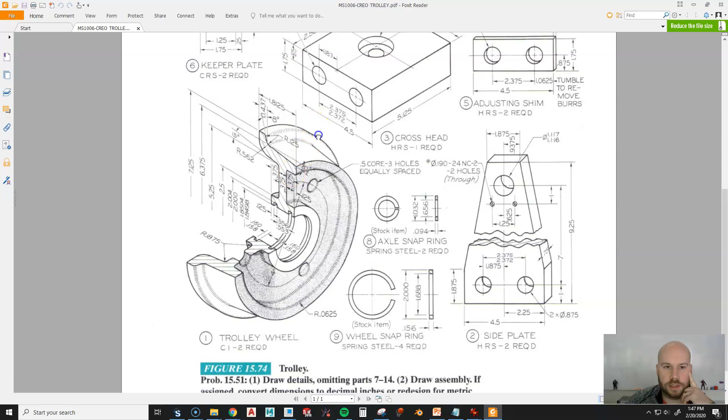Today we're going to make a drawing of this trolley wheel. This drawing has a lot of really oddly placed dimensions because of all the different functions that this thing handles in this assembly. So there's a very specific way we want to go about it. I'm going to show you some techniques. Your drawing at the end doesn't have to look exactly like mine, but I'll show you some ways to organize things and get them in place.

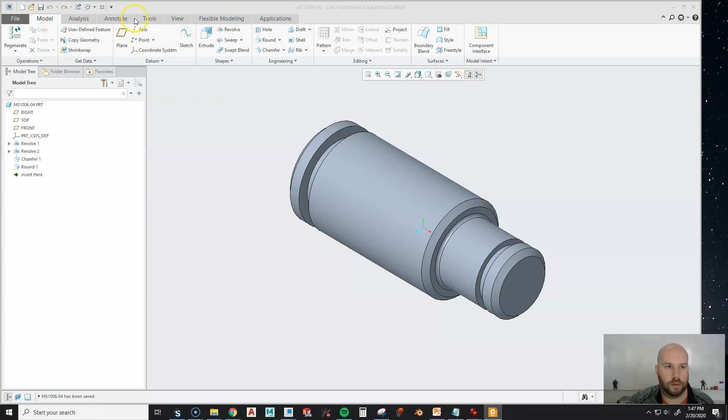I'm going to pull up my wheel I made in a previous video. I'll go New, Drawing, and name my drawing what I named my wheel - maybe different for you. Empty with format. I'm going to browse and pull up one of my formats that I've created in a different video. So this is a big piece.

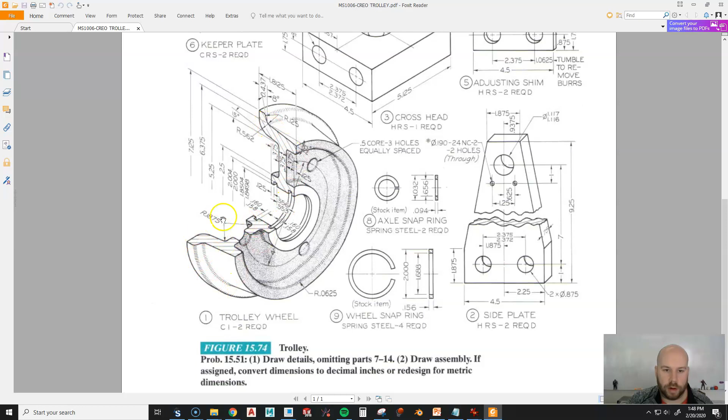I'm going to assume I need at least a couple views, and with a lot of dimensions, I want them easy to read but not crowded. So I want to look at a C or a D size. Looking at this piece, we have a lot of diameters, widths, rounds, probably going to need some sections too. So I'm going to lean towards a D size just because of the complexity of the piece, though I could probably get away with a C size - I just want a little more room, to be honest. I'm going to go ahead and pick that and hit OK.

Now, because I haven't put any parameters into this piece in the video I made it, it's going to have a lot of parameters I need to fill in. The material for this is cast iron, no material 2. The title is Trolley Wheel, no title line 2. Next assembly is going to be whatever the assembly drawing number is for this year's project - it's MS-1006. Drawn by me. The revision is going to be a dash for now, and the date I'm drawing this is 2/20/20.

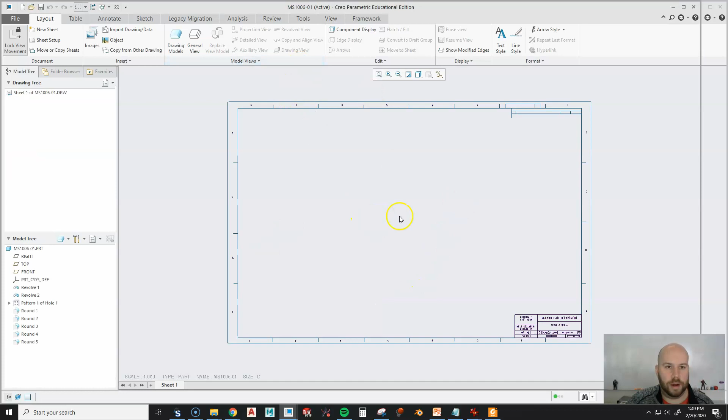Good vision today. Okay, so now I've got my template here. I'm going to hold right click and put it in a general view. I'll turn off the combined state since that doesn't apply here, so I'll hit OK, then left click.

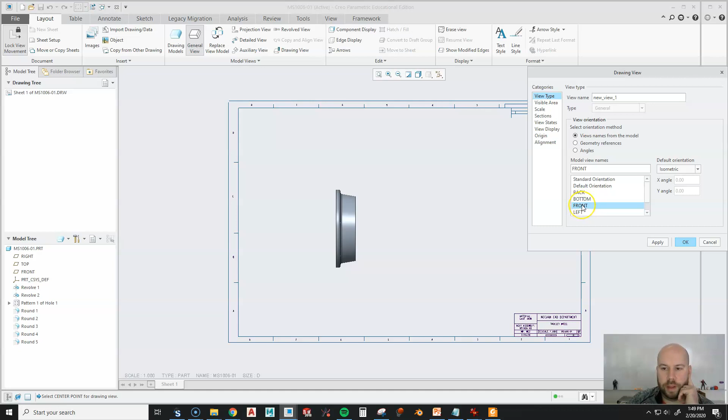I'm going to look at a couple different things. First off, this is probably not my best primary view. The reason is that this one here shows much better what my overall part looks like - it shows right away it's round, and tells the person who has to make this what type of material stock to start with. So I'm going to hit OK on that one.

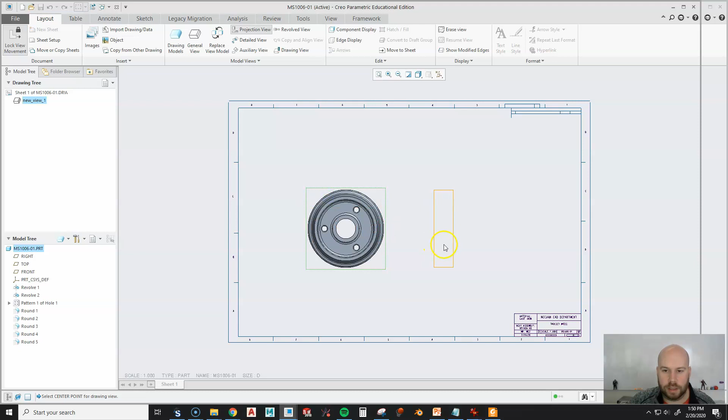Now I'm going to project some views off. First off, I think I'm going to need a side view for sure. That's going to be important because I have a lot of features that are inside. I might be able to get away with just using a section on this, but I have a feeling I might need more views than this. I'm also going to throw a general view up here because I want a nice ISO. I'll hit OK.

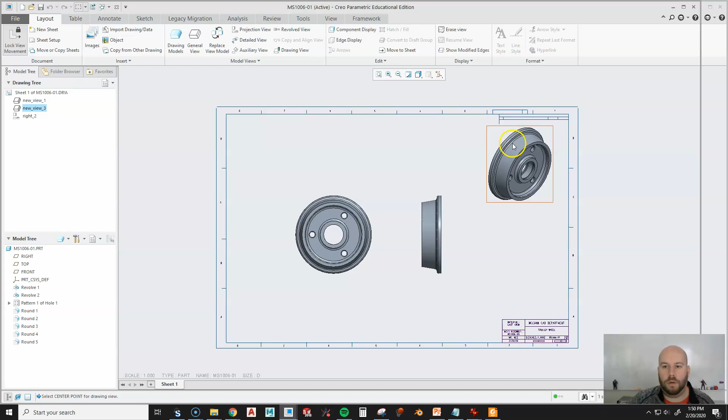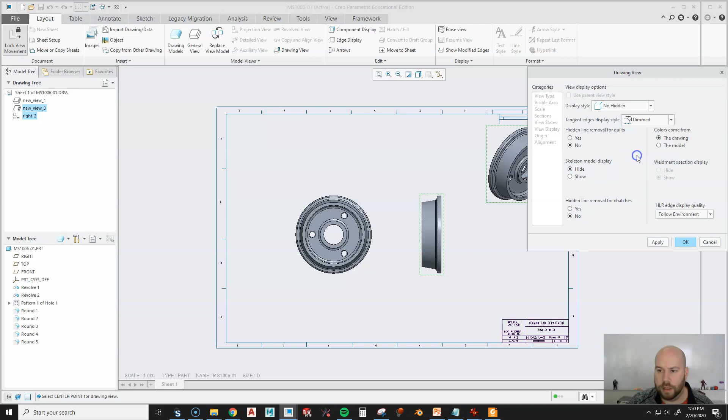Here's why I do that - now I can hold Control, pick all of these at the same time, right click, go to Properties, and change all of their display style. There's a lot of features here, and I don't see value in showing hidden lines on these two, so I'm going to go no hidden. I like the dimmed setting - it's up to you what you want to use, but I really like dimmed for tangent edges. I'll hit OK.

Okay, didn't pick that one, so I'll do the same thing - view display, no hidden. It's getting aggressive. Dimmed, I'm going to hit OK. Now I can't move my views right now - that's because I have to turn off my lock view movement.

You can turn that off in your DTL settings if you want to. All right, I'm going to move that down and move this over.

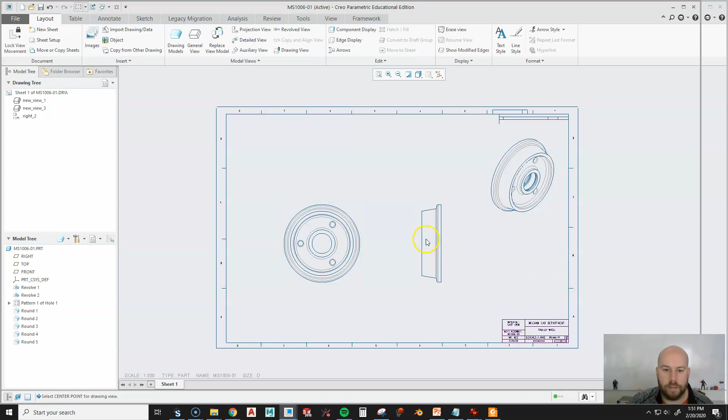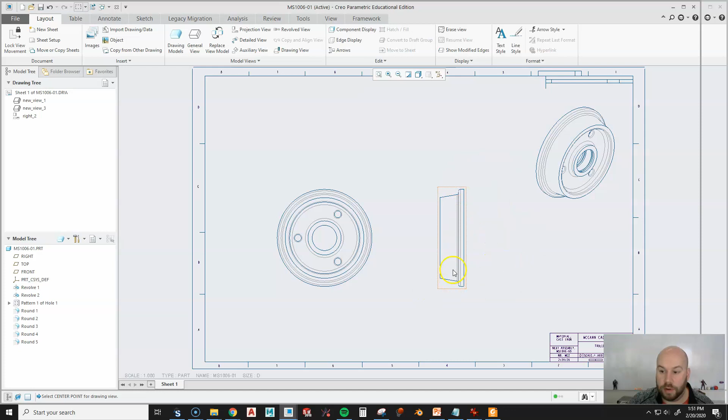Okay, now I probably need a section. Just to make it a little simpler, I kind of like this side, but I do have the potential of a hole crossing through this here. So I might want to use this one for showing maybe just simpler outside features, and then maybe I want to project a view up here.

I'll double click it to change my view display. No hidden, dimmed, I'm going to hit OK. Maybe this is a better one for my section because then my cutting plane is going to go right through this circle and I can show the rounds on either side of it.

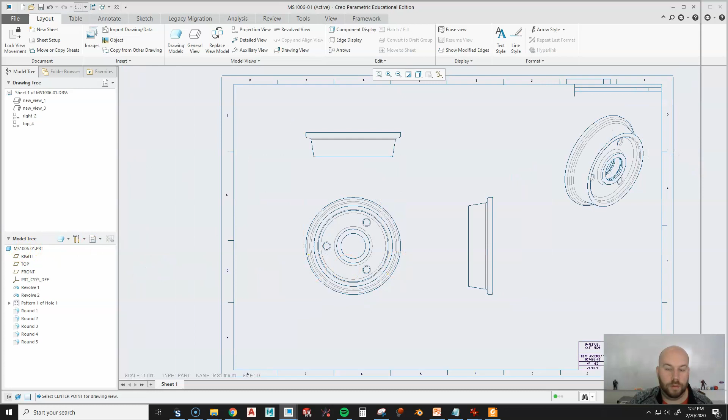Okay, so now I'm going to go back in my part. I'm going to put a section view in. So I'm going to right click on 1006-01. I'm going to hit Open. And then I'm going to go to my View Manager right up here. And I'm going to pick Sections.

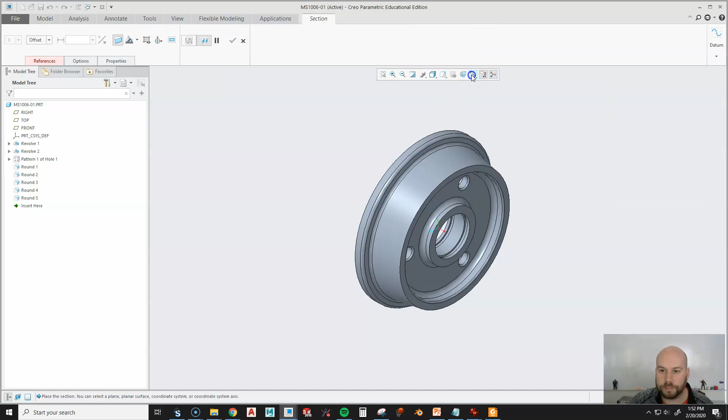I'm going to go New and I'm going to make a planar section. I'm going to name this section A because it's my first one. I'm going to turn on my planes. I'm going to say A goes right through here.

Okay, and you can see now, I can see that round really well, and I can see the hole goes through. So I'm going to hit my checkbox. I'm going to say close. I'm going to save it. I'm going to close out of this. I'm going to come back over here, and I'm going to turn my planes back off.

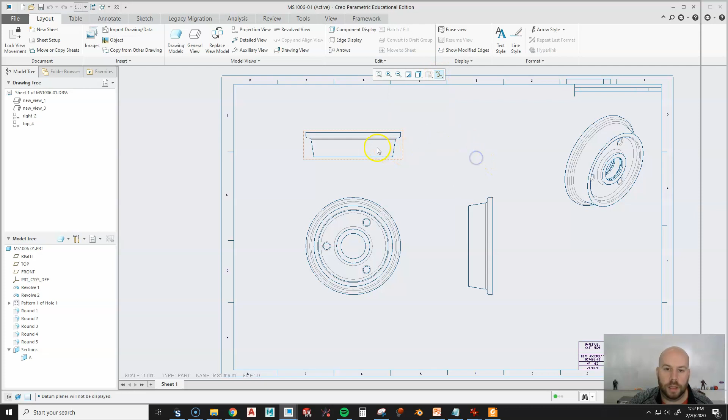Okay, now I can double click on this view, which will bring me into properties. I'll go to sections, 2D cross section, hit my plus sign, go to A, and then the other thing I like to do is scroll all the way over.

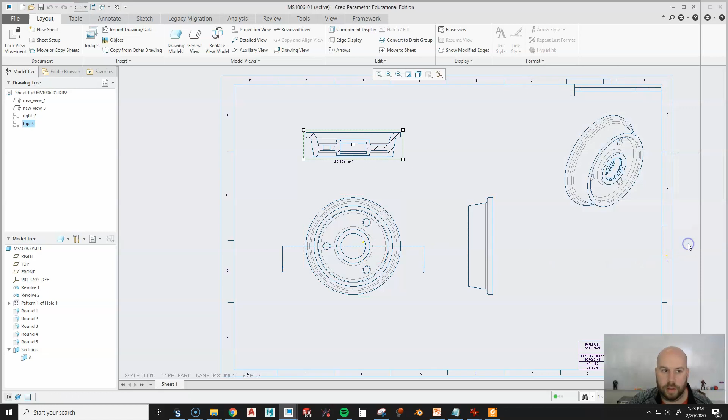I can do this after, but I'm going to select this. I'm going to say I want my arrows right here, okay, on that view. So now I can hit OK. And now I've got a nice section here that shows everything.

Now there's a couple things I like to do every time I put a section in. First thing, I hover over the hatch, okay, and then I left click it, hold right click, and go to properties. Okay, now here's why.

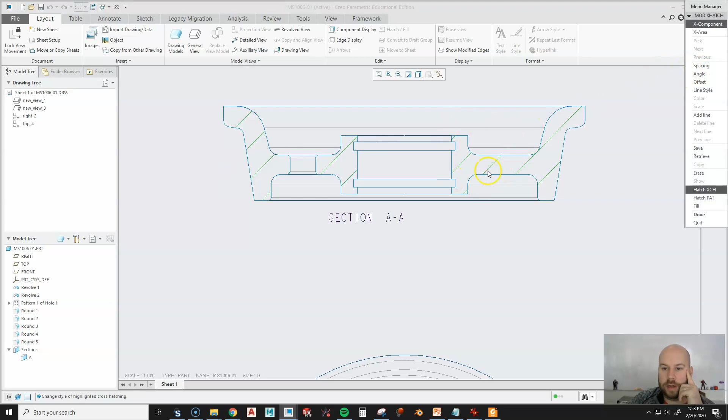All right, I do not like the spacing of this right now. If I zoom out, you know, I can kind of tell it's a section, but the spacing's not dense enough for me. So I could go spacing, and I can go half. All right, that's probably good. I could even go more if I want to. I like kind of a dense section like that personally.

All right, I can also mess with all sorts of other stuff. Right now, this is at a 45-degree angle by default. I could go 30, I could go 0, I don't know why you'd go 0, 30, 45, 60. I could change it if I want to go 44.75 for no reason. I could do that.

Okay, when you're making an assembly section, this is much more valuable because now you can differentiate parts a little bit easier. I can change styles, everything, but I'm good with this.

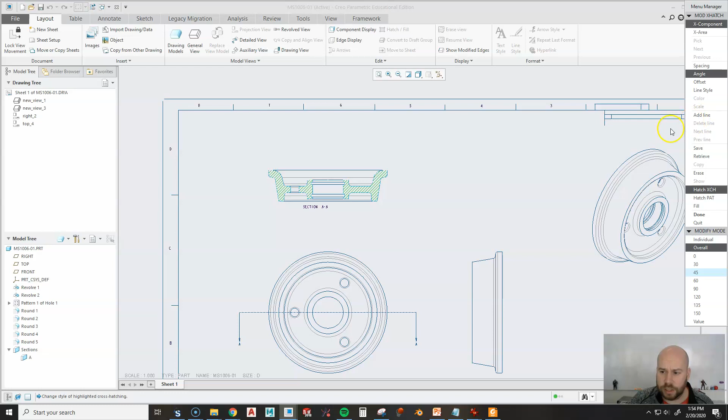So I'm going to middle click a few times to get out of there. And then when I left click, you can see now my section's a little bit better.

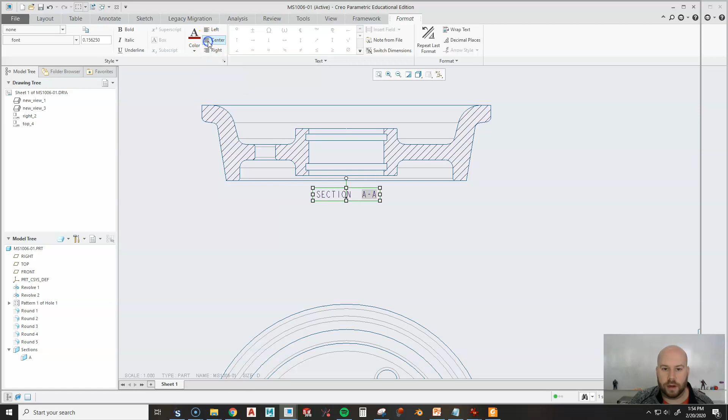All right, the other thing I like to do is I like to pick the section title, go up to Format, okay, and I like to move it to Center because that'll put it right in the center of your view. Don't ask me why it's not that way to begin with, but it is.

So I'm going to left click. I'm just going to drag it down. I'll probably put an offset line in or something later on.

Now, as far as your section cutting plane goes, the way I like to move it around is you can left click on the cutting plane to highlight it. Now you can see I get this little movement arrow. If you click on the arrow that's coming out and left click and drag, you can see both of the arrows move together.

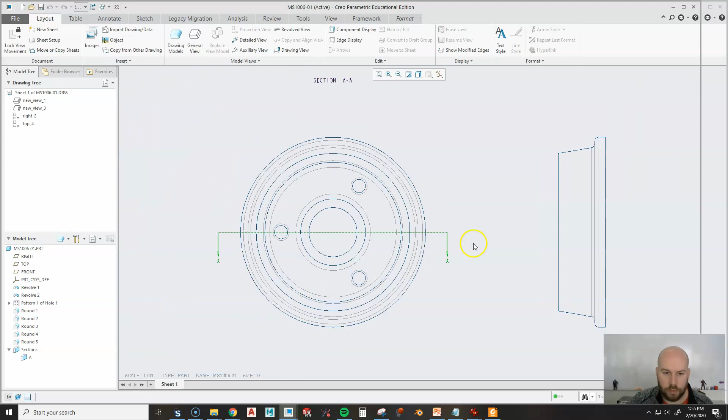Okay, so I can drag this in, and the arrows will stay in line. Now in some scenarios you might need one that's a little longer than another one. Then you just click on the arrow and drag it out. But if I'm clicking between the arrow, like the line that comes from your phantom line, it's going to move them together. I like them to be at the same length unless I have to move it around for some reason.

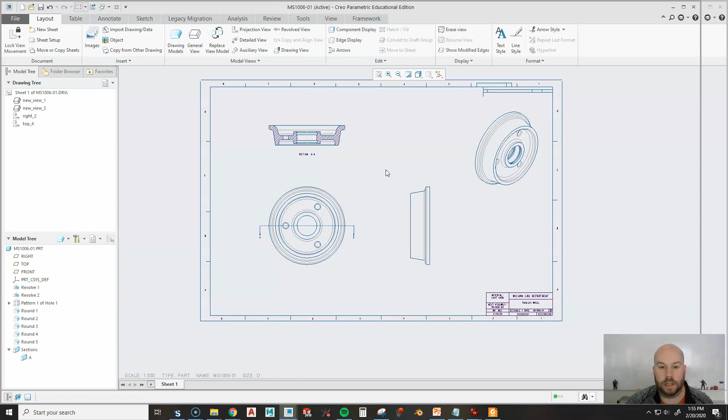All right, now I'm going to give myself some space. So I'm going to left click my view and spread them out a little bit. And I'm going to start putting in some dimensions and see where the best places to put them are. Now where my dimensions go are going to dictate, for example, if I have axes that are showing or not. As we go, that's probably going to become more apparent.

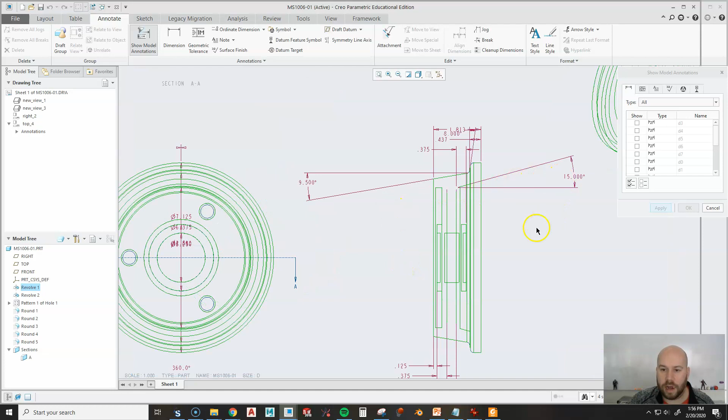So I'm going to go to Annotate, Show Model Annotations, make sure I'm on the Dimension tab, and what I like to do is just kind of go right down the tree. So I'll go Revolve number 1, I'll see what pops up. Revolve number 1 has a lot of information, and the reason for that is that's basically all of my dimensions other than my retaining rings. So there's a lot of information I need here, and a lot of it's going to have to go up here just because I can't see some of that interior stuff.

All right, so basically what I'm going to do is turn them all on. I'm going to hit apply. I'm going to close out of this, and then the first thing I always do is I pick my 360 and delete it because we don't need 360. It's round, we can tell.

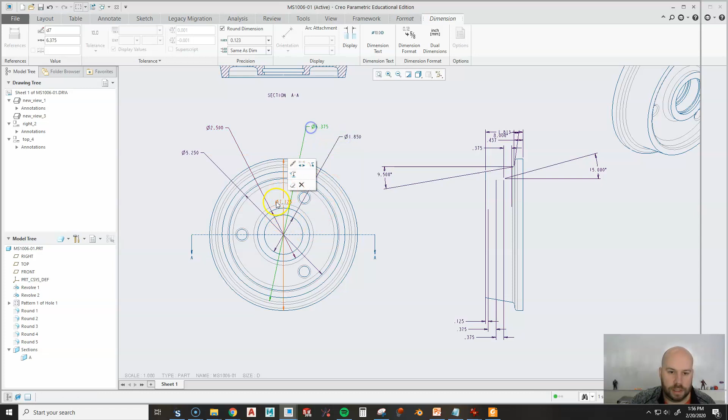All right, then what I like to do is drag these out. So I just left click it once and then left click again and drag, and that allows me to change where my dimensions are going just so I can see. I mean, obviously the size gives it away in some respect, but now I can see much easier which are my smaller ones, which are my bigger ones, etc.

So now I'm going to start moving these around without any real rhyme or reason right now. These ones all go to interior features, so I'm going to select them all. I'm going to hold control and pick this one too. See what else—that one's probably good for there, that one's probably good for there. This one's definitely not. All right, so I'm going to hold control, select each of them.

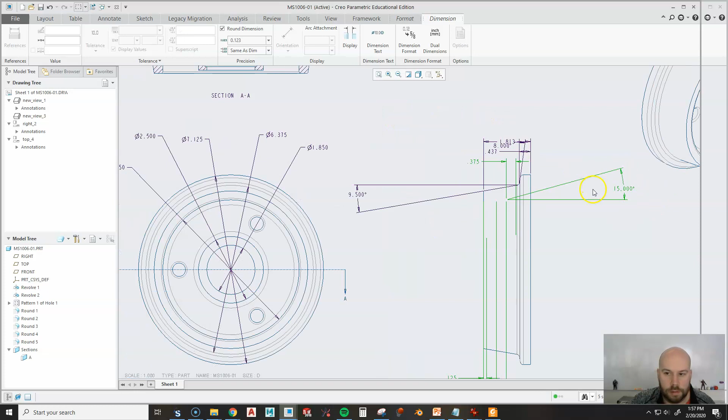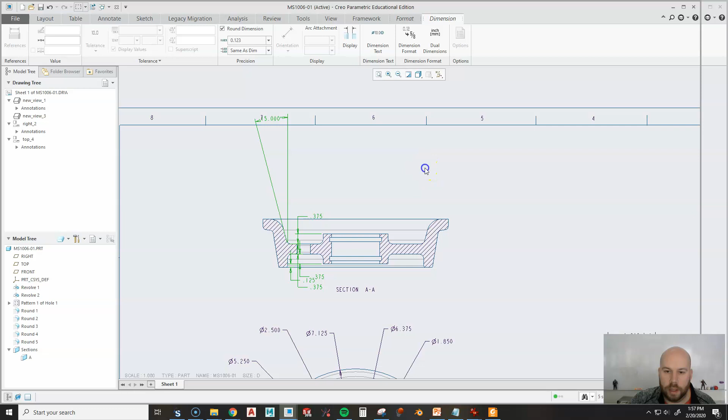I'm going to right click, and right up here we have move to view. So I'm going to select move to view, and click this view. Now, first thing I do before I move anything—because if I move it right now, they all move together—I'm going to click, so then I can click these manually and move them around.

All right, so I've got like a 15 degrees. That looks like a pretty handy dimension to have. However, I probably don't need all those decimal places. So once I pick it, I can change my dimension format to have 0 decimal places.

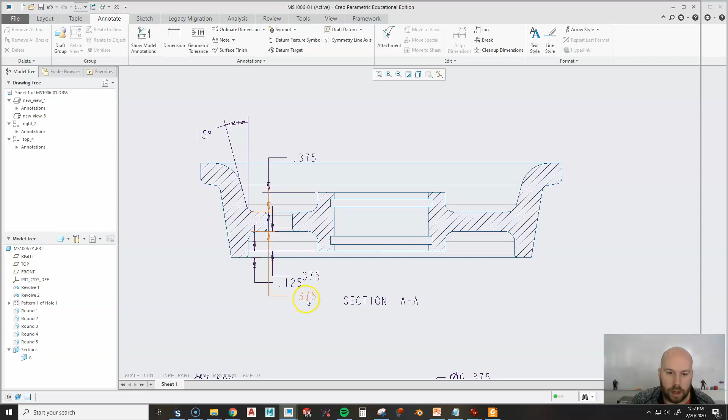All right, let's see what else we have. We have the thickness there. We have a distance to the front. And we have a thickness from there to there.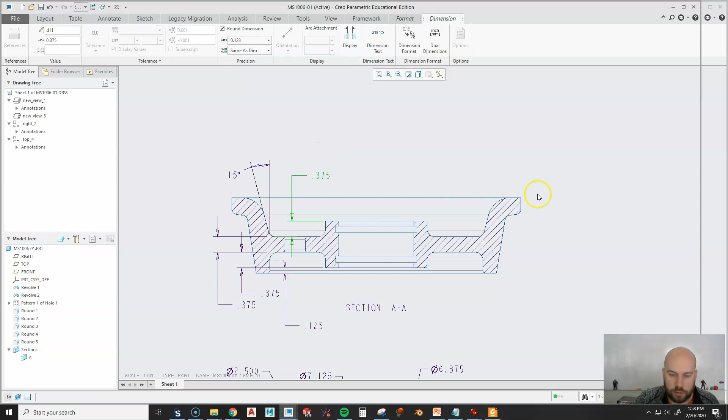All right, now I'm going to assume all these dimensions are actually needed. If I was personally going to dimension this thing, I might not dimension it the same way. But because that's the way the drawing initially looked, I'm going to assume that these are functional dimensions that are much more valuable than the way I would typically dimension it. So I'm just going to leave those how they are for now.

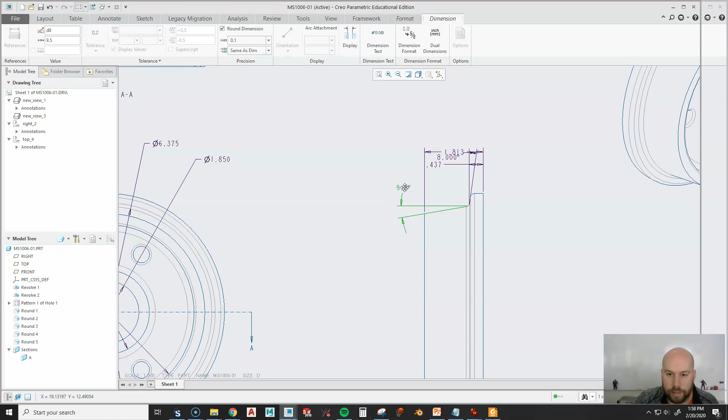The 15's a little cleaned up, but otherwise, I'm not going to mess around with it. Now this guy, 9.5, I can't go to 0, but I can go to 1 decimal place. Save myself a little space there. Okay, and then I'll probably just drag it out like that, flip it. All right, now I'll just drag this down.

That looks like a pretty good place for that dimension. A little confusing, might not be the way I'd dimension it, but I'm going to assume the people who made the drawing we're working off of had a reason for why they were showing these dimensions.

All right, I've got an 8 degree here. I can change that one. All right, I can move this up.

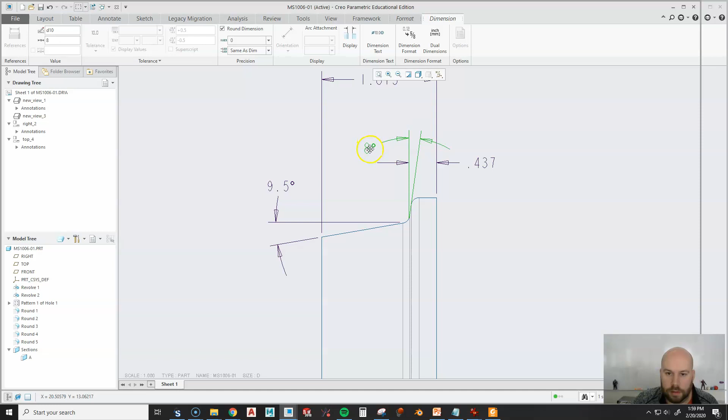And I'm going to flip that out, and now I've got a little bit of dimensions bunching together. So I'm going to take both of these, hold control, pick both of them, bring them all down here, and bring all these extension lines down too.

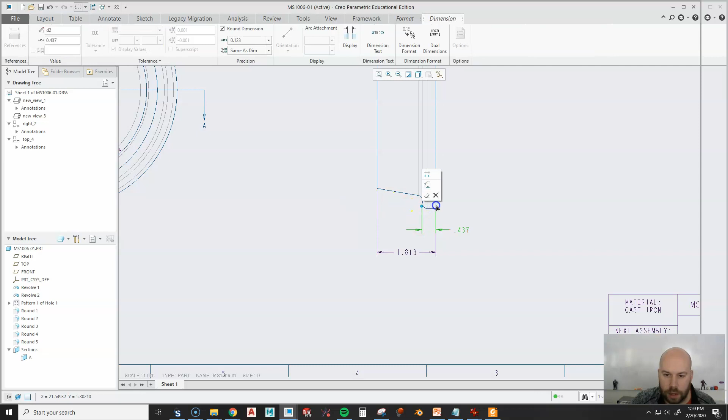And then I'm just going to rearrange them. So I'll go, you can go right there, you can go right down here. We'll bring that up, leave a little gap. Same thing, bring this up, leave a little gap as well. We'll rearrange them as we go.

Now the other thing I'm going to do is move my outside dimension over as well, because I think that's probably easier to visualize from over here. So I'm going to pick it, move to view, move it over here. Yeah, that looks like a way better place for it.

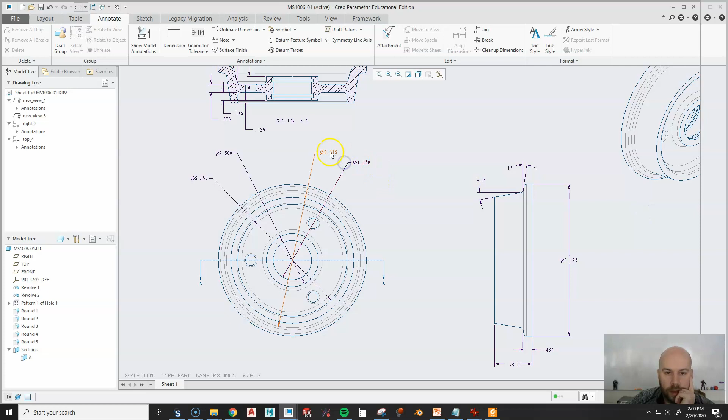Okay, now let's see what else we have. We've got a 6.375. That might be a good one to move over, so let's see if it works. We move it over, that looks like a logical place for it. Gives us a reference for that 9.5 degrees.

I like that. All right, we're going to drag this out a little bit. I don't love that this goes to like a theoretical intersection, but it is what it is.

Okay, let's see what else we have. This is our outside diameter of that. And this, let's pick this one, move it over to see where it goes. Yeah, so that's an interior dimension.

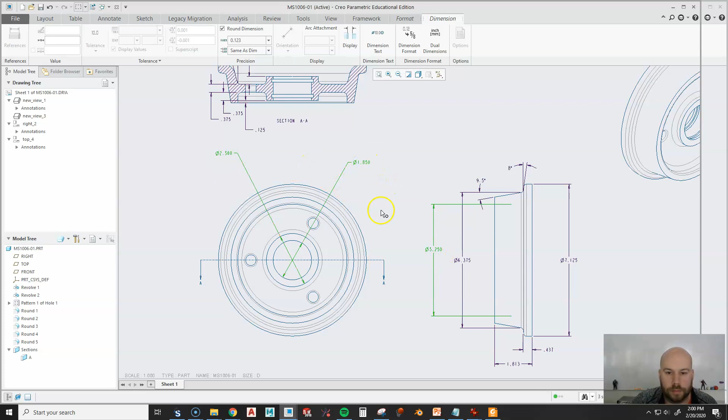So we're going to move all 3 of these up top. I'm going to hold control, pick all these, right click, move to view, move them up here. Yeah, that's a way more logical place for these.

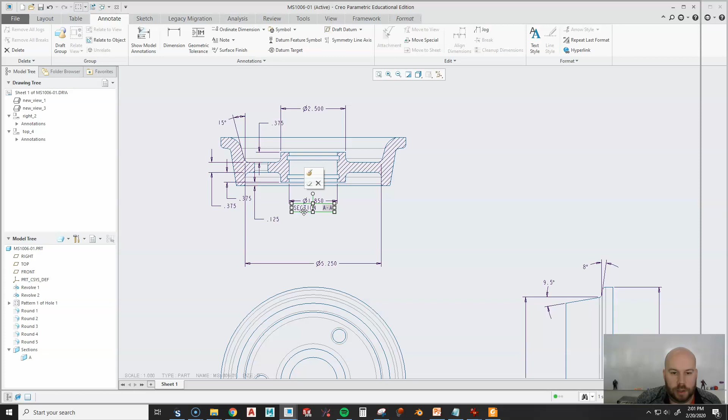Okay, so, excuse me, now I have a couple other options I can do. So first off, this stuff's really crowded right now, and it's going to continue to get more and more crowded as I add more dimensions. But I at least have a logical place for some of these things.

Now for me, I think we'd be better off with a detail view that could kind of simplify all the stuff that's going on inside here. So we're going to do that. All right, here's what I'm going to do.

I'm going to go back up to layout up here, and now I can pick detailed view here. It's also under here - if I hold right click, I can go detailed view here. And it says select the center point on the existing view.

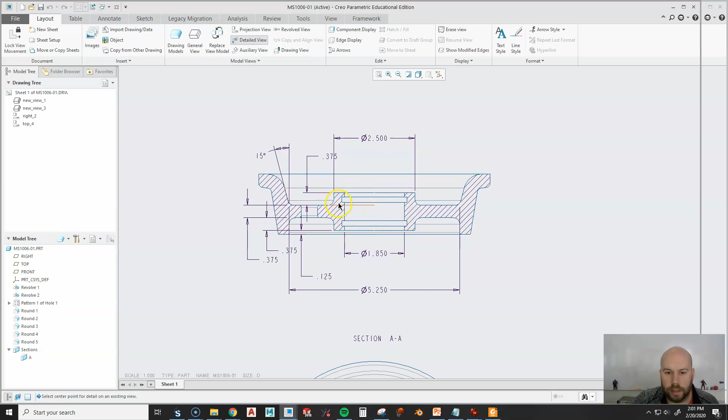Now in this detail view, I'm going to put all of my widths and everything of my retaining rings. I'm going to put basically a nice little section that goes from the end of this all the way down to this down here, so I can stick that 0.125 in there as well.

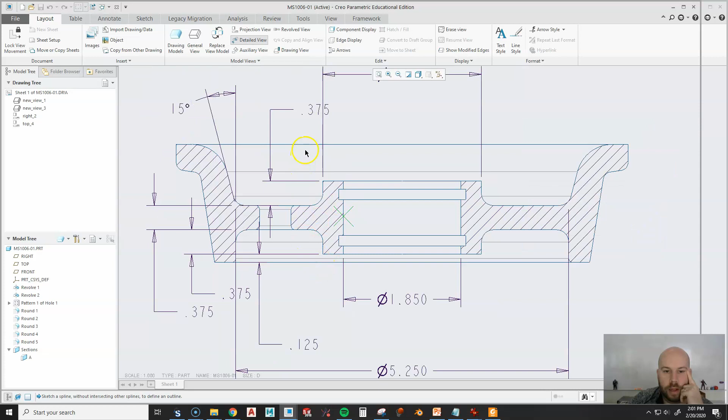So I'm going to say the center point's probably somewhere around here. And then it says sketch a spline. Now when I create a spline, I'm going to create it kind of like this, going right through here, making kind of a squiggly line.

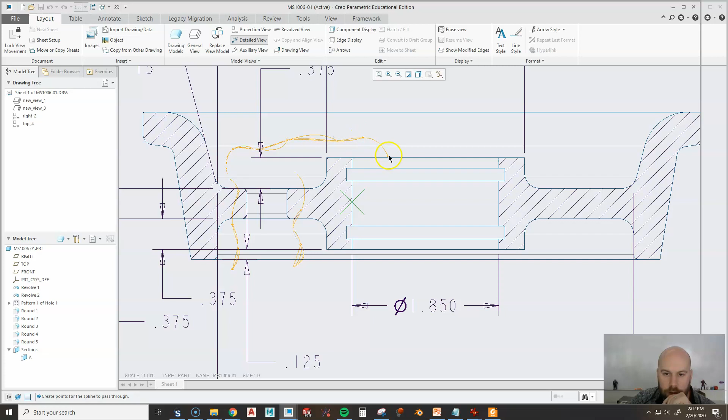Actually, you know what, I'm not even going to do that. I'm going to get this in here too so we can show the rounds all in the same thing. All right, so I'm going to make kind of a squiggly line to show that it's a break. Bear with me, I am super picky about these, so there's the potential that if it doesn't look good, I might redo it.

All right, when I get back to my beginning, I'm going to middle click. There's my detail. I'm going to say put it right over there.

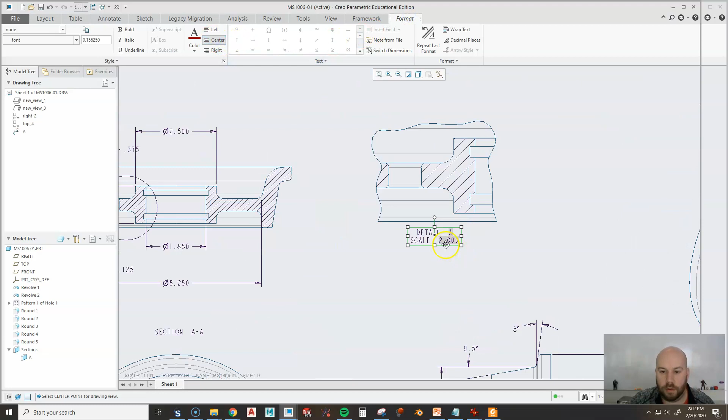Now, same sort of thing. I'm going to pick this, go up to format, say center it. I don't know why it's not centered to begin with, but it's not. The reason I like this is that when we put those retaining rings in, this is going to be a much more natural view to show them.

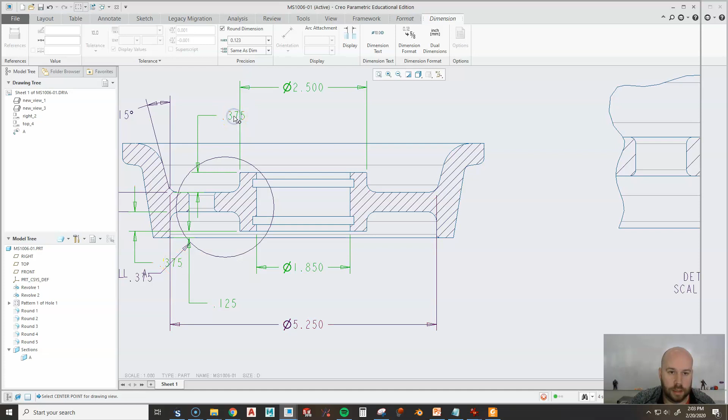So now I can take this one. I can take this one. I can take this, I can take this, I can take this, and I can move all of them to that detail view. All right, we're getting less and less crowded by the second.

Actually, you know what, I'm going to move this guy over there too. So now I can take this, flip it. And then I'm going to do one of these, so I'm going to right click it and say flip my text, flip it out like that.

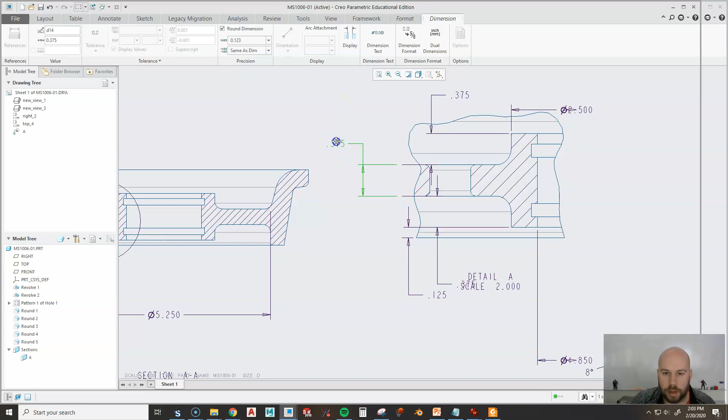Let's see what else we have. We've got this guy here. Not really a nice place to put these. Let's go like this, let's see if we can make these look nice.

Same thing, hold right click, flip it. The other one's going to be the pain, I think. That's okay. All right, so let's take this one, just drag it out, close it, flip it again.

Yeah, there's really not going to be a nice way to lay these out. Let's move these out, let's move this one out, and then let's flip this one too. All right, now I'm going to bring them in a little more, save myself some space.

These look fairly well spaced out. Now I've got to adjust all my extension lines. So for this one, I'm going to have to drag it out to find where the end of it is. There it is, drag that to there, bring that right in like that.

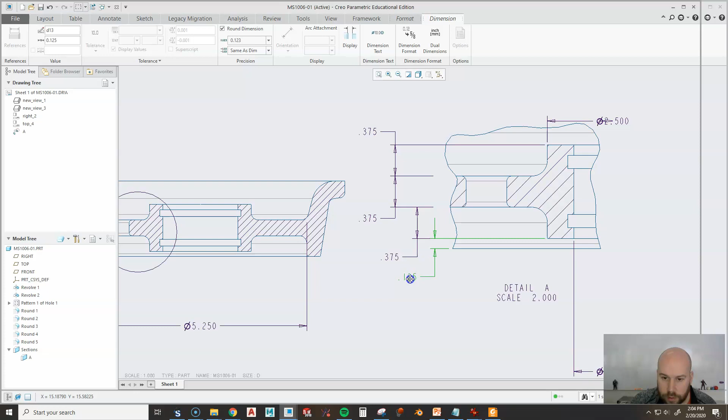For these, that one's pretty good. This one's going to have to go to where my break is. This one's going to have to do the same.

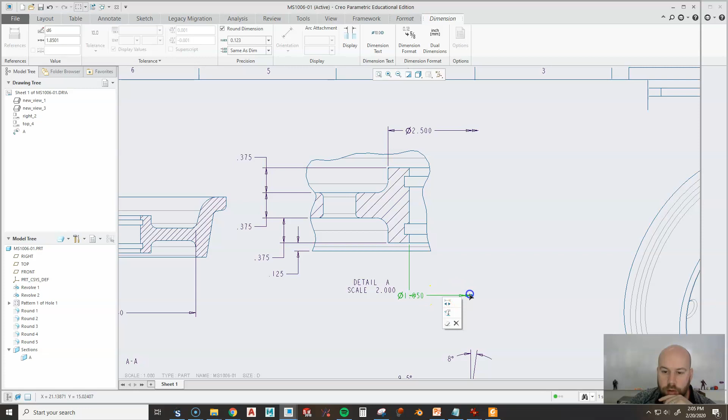All right, now for our diameters, I got a couple things I've got to do. So I've got to pull it up like this. If you don't show the other end of the diameter, it gives you this nice double line, which I really like, or double arrow I should say, because for whatever reason, it just saves you a little space, makes things look a little bit better.

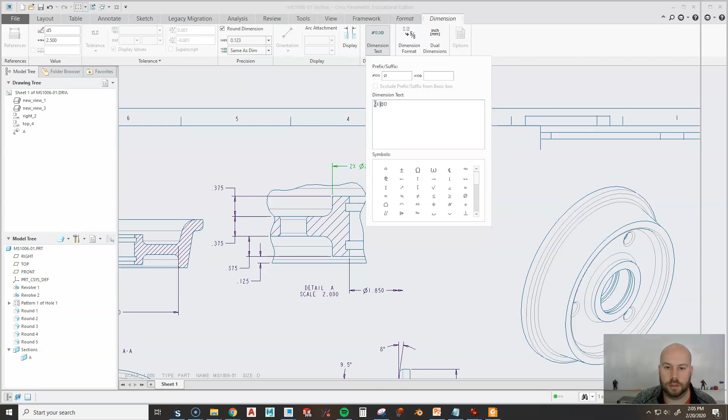So for this one, I'm going to go in here. I'm going to change my dimension text. I'm going to say that this applies to 2 diameters, so 2x in a space will do that for me.

Let's see, do any of these? No, that one's good, that gets us to there, that gets us there. So none of these need any notes. This one I could technically say 3 times, but it's kind of understood that hole goes all the way through.

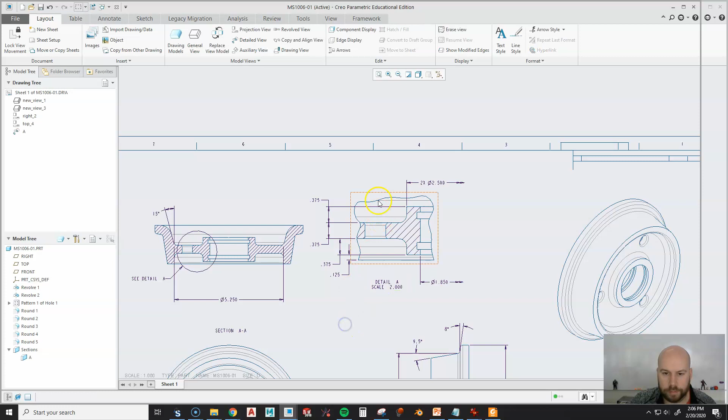All right, I can move this one over, and I can move my whole view over, give myself some more space. Actually, I can even drag all this down. Drawing's looking better by the second.

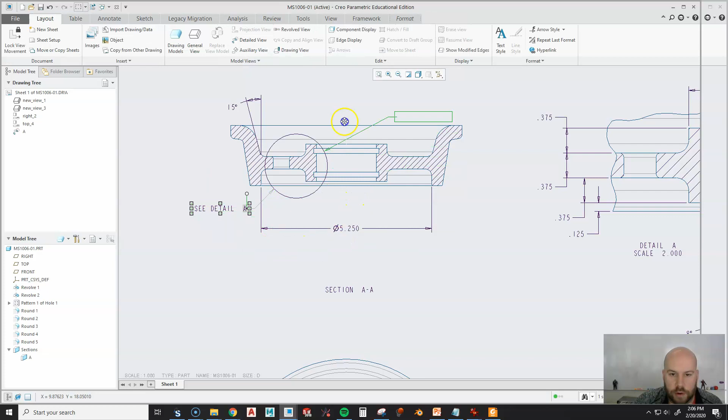Okay, now over here, how am I looking? I got to fix some extension lines. Make sure I'm nice and centered. My detail view, I just pick that, I can drag it around. I like that up there, I think that looks good.

Okay, got my angle here. Drag that extension line out. It's looking pretty good, I think. All right, this one over here is still looking good.

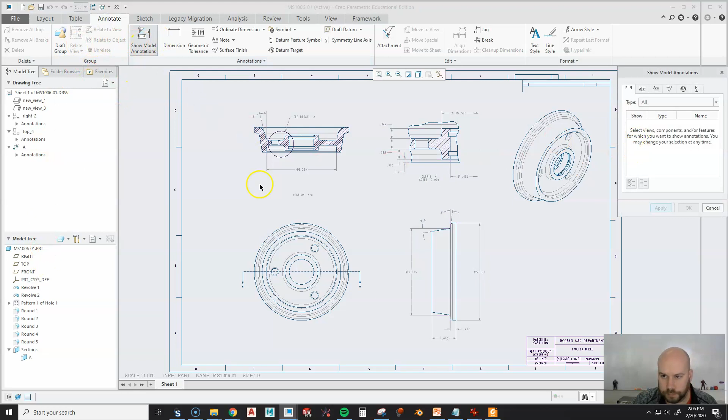Okay, so now I'm going to go on to my next one. Show model annotations, dimension, revolve number 2 -- these are my retaining rings. This time I know I only have a few dimensions, so I'm going to go through and left pick each of them, hit apply, and close out of there.

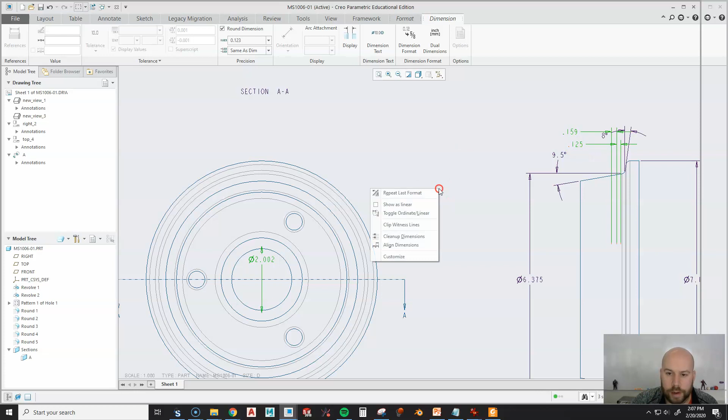Then I'm going to take each of these, hold control, hold right click, I'm going to move them to my detail view. And now here's the advantage, okay? I can drag this down, I can drag this down, just like this.

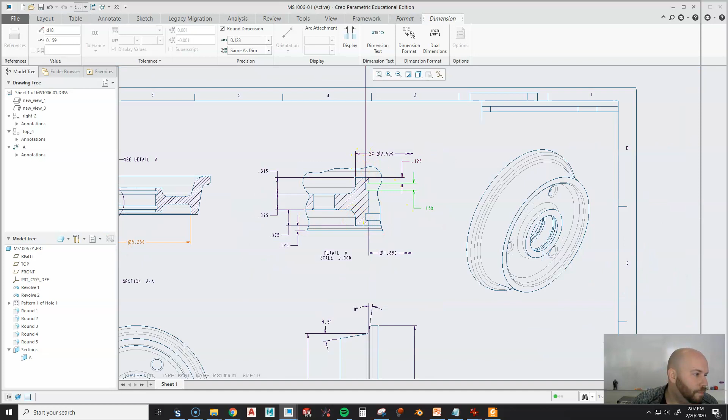And I can say, I'm missing a dimension here. One second -- show model annotations, revolve. There it is, missed that one, sorry. Hit OK, I'm going to hold right click, I'll move it up here.

Okay, so now I can kind of organize all my retaining ring dimensions in a nice, hopefully nice fashion.

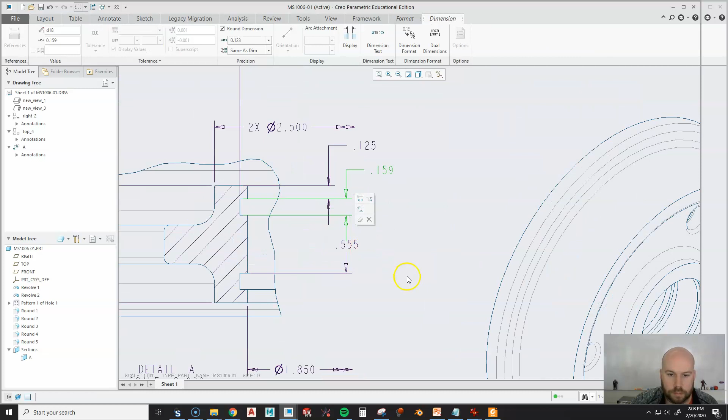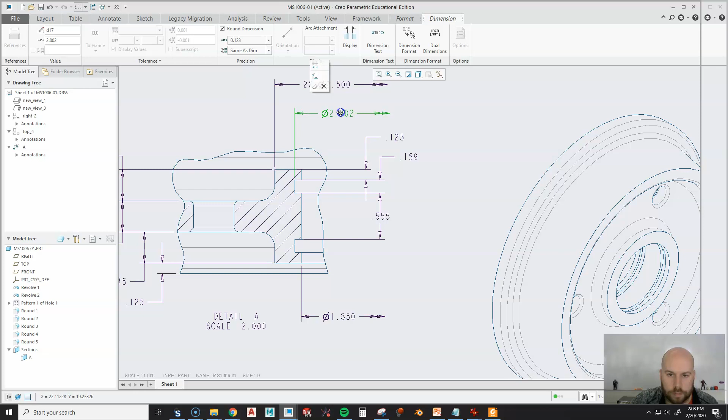So we'll drag this one out. Go find where that one ran off to. Drag that one down, same thing. Drag my double arrows out. Might have to move it over first. Drag those out, and then I'll drag this in like this.

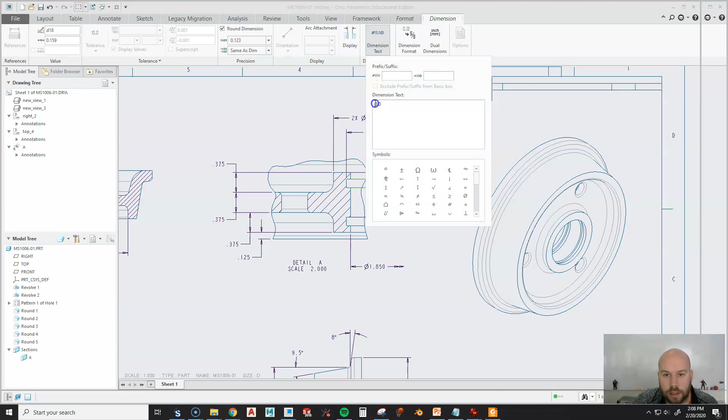Move that right up there. Okay, so now I've got a nice layout there of each of these. This applies 2 times, so I'm going to click that, dimension text. There's 2 grooves. All right, now I've got some dimensions there.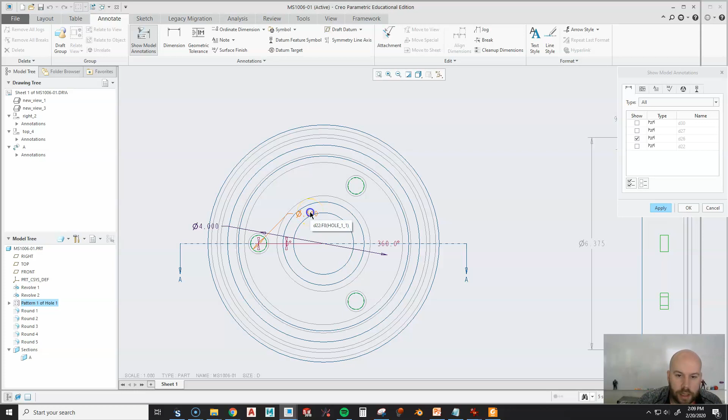Now next one, I'm going to show my pattern of my hole. What I'm going to do is make myself a nice note that absorbs some dimensions. So I'm going to drag this out here. Now, first thing I need to do is figure out what this dimension number is. It's D22. By clicking it, I can see that. So now I'm going to go in here and go dimension text.

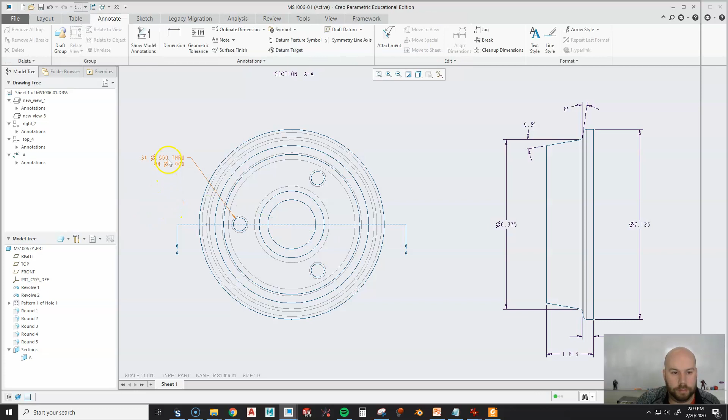And say there's 3 times these. They go through, and they're on D22. You can see it puts that 4 in there, and now when I click out of there, it's there, and now I can delete that and get rid of it. All right, and that's just a simple way to say that.

All right, and actually I can add a little bit more, and I'm going to add equispaced, or you could always say EQSP, equally spaced. Used to work with a British guy, always put equispaced. Probably the only place I've ever seen that word.

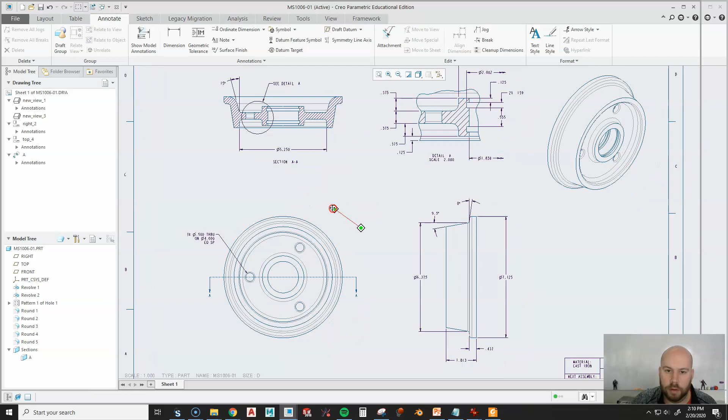All right, clean this up. You can see I'm very over the top with the details stuff, just moving stuff around, making it look nice. But this is a constant thing. You have to just kind of constantly polish your drawing here if you want to make a really nice drawing.

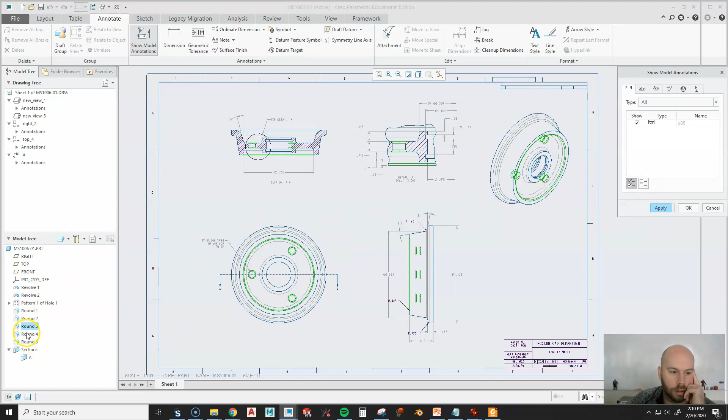Okay, so next thing I'm going to do is work my way down. So now I've got some rounds, and you know what I'm going to do for those? I'm just going to show all of them. All right, so I'm going to go, okay, yeah, that one works. This one, good. This one, good. And I'll move them around after.

Okay, so now let's see what I have. This one, probably in a good place as it is. Just drag it maybe out like that so it doesn't interfere with anything else. Maybe I'll put this over here. That looks pretty good there. It's maybe not a bad place for it.

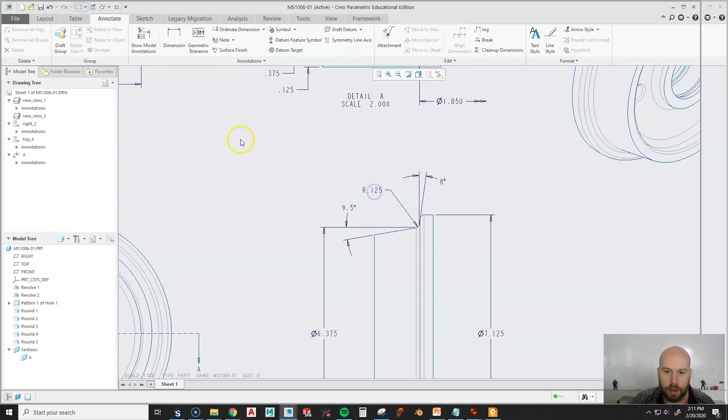Now this, hold control this, this. These are all rounds that I should probably show in my section view. So I'm going to move them up here. All right, and now I can pull these out in a really nice, easy to read way.

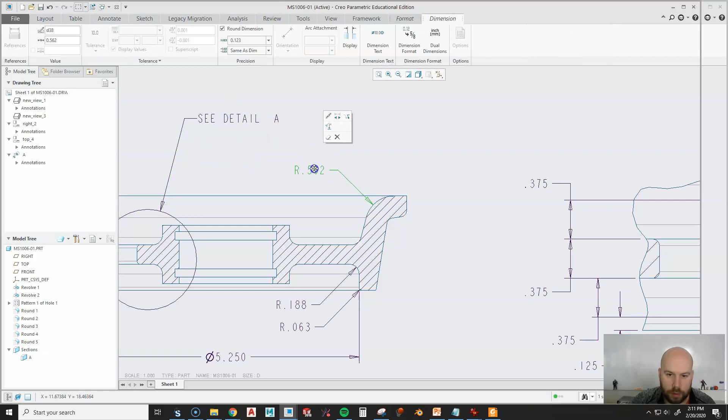So I'll drag that up. That one looks good right there. This one looks good there. This one looks good there. All right, so I don't have any problem with those.

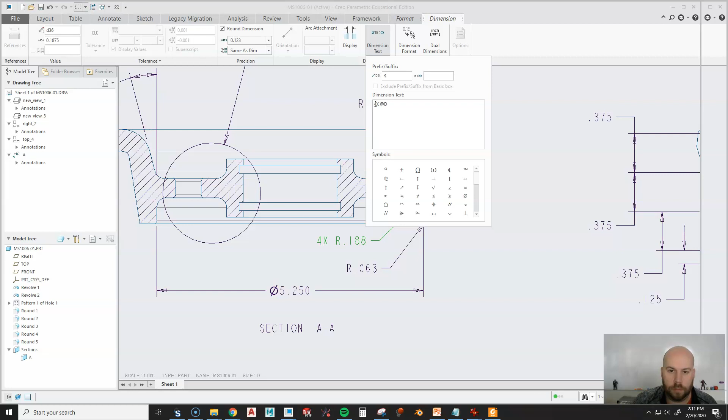Okay, but for this one, this actually applies to both these inside ones and here. So I'm going to say for this one, this is 4 times. This one's 1 time, this one's 1 time, this one's 1 time, and this one I should probably go up here and pick Edit Attachment. I could actually come up here and pick this.

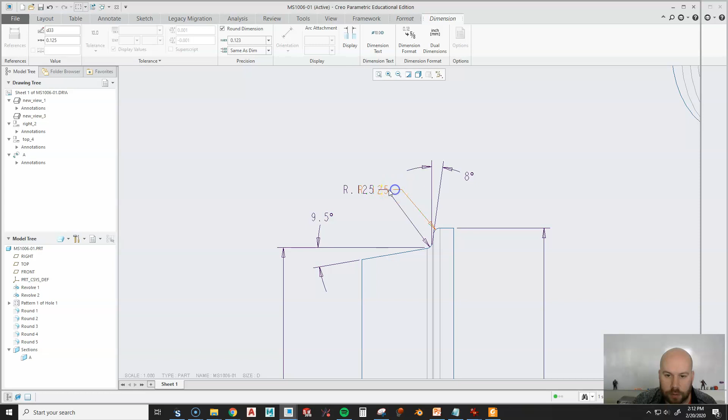I'll stack these together so it's really obvious. Just like that. There we go. Nice way to show that. Okay, now I've got all my rounds in.

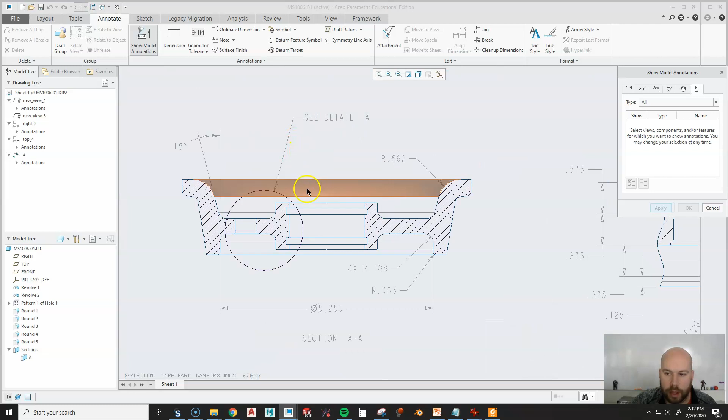All right, my last step is getting my axes. So I'm going to go Show Model Annotations. I'm going to go in here. Okay, and I'm going to look at what do I have that is dimensioned out of diameter here. So I'm going to show in my view.

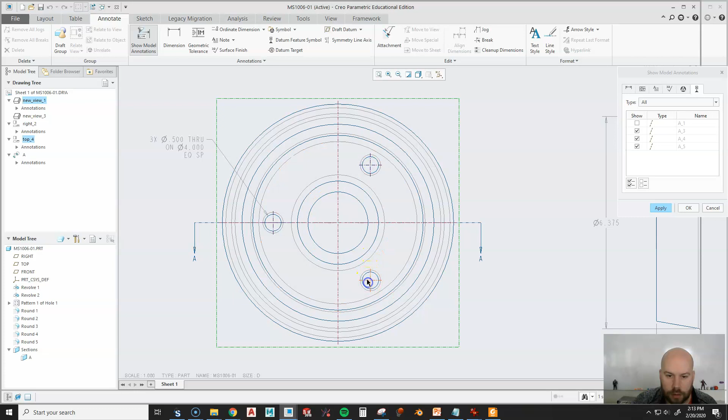I'm going to say, well, I definitely need the one that goes down the middle. Now over here, I don't have any really to show. Over here, I definitely want to show my 3 circles and also my main axes down the middle. And over here, I just need the one down the middle. I'm going to hit OK. And now I have a nice drawing.

Okay, and actually put in like the limit dimensions and stuff. We'll do that in another video.